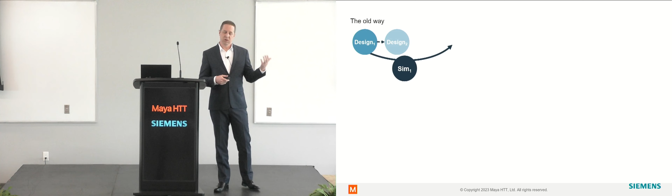If we look at the normal design analysis, design simulation process, we'll often start with the designer releasing an iteration of their design, send that off to the simulation team, and simulation is often a bottleneck. It's hard to do, takes a long time to do it right. By the time the simulation results come back, you're already on iteration 3, 4, 5. You might kick off the latest iteration for simulation.

And that cycle can continue for a while. This isn't really a communication problem even all the time. This is just because simulation takes time to do correctly. It can be a communication problem as well.

I know I had an example where I was working on a project, doing the simulation for about a month, and came back with the results. When I came back with the results, they told me that the design actually changed about 2 months ago, and nobody told me. So what do you do in that scenario? Well, you make a tough choice: either decide if your simulation was good enough then, or you have to go kick off this whole cycle again.

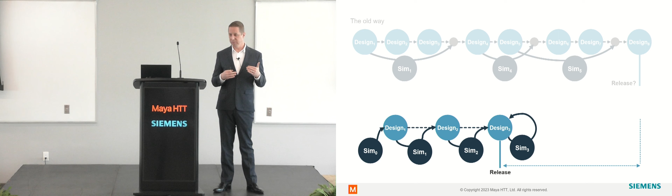But if we think about it for a second, what if I could take some of the insights of simulation? I could use those to actually feed into the first iteration of the design. And then from there, each successive iteration, I could use some simulation insight to feed into that. You're going to get a much better product. You're going to be able to look at more concepts. You're going to get a more robust product, and get it right the first time.

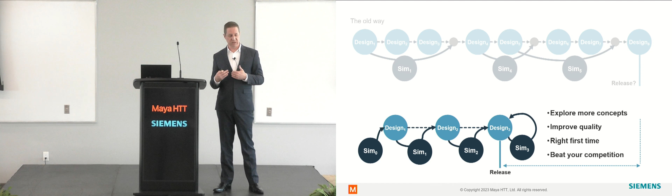And that's kind of what I want to talk about today: how you can accelerate your design process by taking advantage of some of the tools and methods that are available now, that you can put in the hands of the designer up front. And that's what we're calling simulation-driven design.

Before I talk about that a little bit more, I actually want to talk again about some of the benefits of it. The Aberdeen Strategy and Research Group had done a study and showed that companies that have actually fully embraced this simulation-driven design concept were able to see a reduction in the number of physical prototypes they had to do. They were able to reduce the engineering change orders after they sent a part to manufacture. That just means they got the part right the first time, didn't send it out to manufacture and then figure out there were problems. In addition, they're able to more often meet their cost targets and also speed up their development as well.

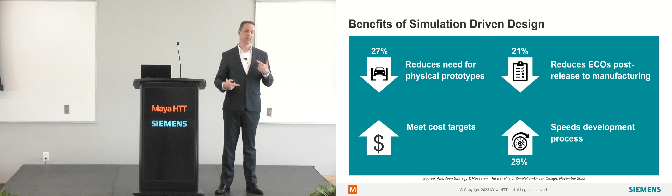Now, those are some pretty excellent improvements, and actually for something that I think any design team can implement rather easily. Some of the tools, some of the methods we've talked about today, they all help. Some of them are harder to implement than others. This one's actually really easy, and often built in already to a lot of the design tools you already have.

And to help walk you through this and explain a little bit what simulation-driven design is, I want to talk through an example workflow for you. We try to come up with something that I think's a fairly realistic workflow that'll explain to you some of the tools, some of the methods, and how you could integrate this into your design process as well.

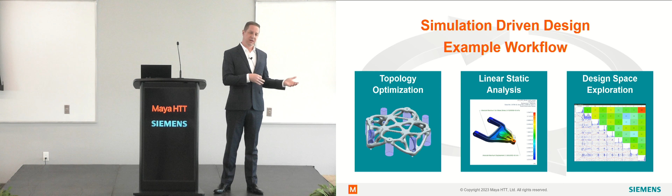So some of the ones we'll talk about specifically are the idea of topology optimization, sort of simple linear static analysis you can do, and design space exploration. Now, these are tools that simulation teams have been using for years, decades even. Now they can be in the hands of the designers up front to inform those designs as they go.

So let's look at topology optimization. Why topology optimization? Why do you want to do that? You've probably heard that name. It's a popular thing nowadays.

You've probably seen a bunch of parts like this, kind of funky looking, kind of cool, and wondered how does that work and what use is that. If you're not familiar with it, what it's actually producing is an obviously optimized shape. Often it's optimized to reduce the mass of the part, which saves material, saves cost, depending upon the process you're using.

Now if you have a 3D printer, if you have a really cool 5-axis CNC, you might be able to take these right from the topology optimizer and go straight to manufacturing with little to no editing, maybe. But the key with any of this is that you want to use this at the beginning of the process up front to get the maximum benefit out of it.

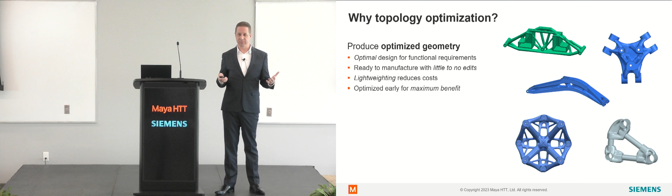Now the part I actually am really more excited about is the design guidance that this can provide. One of the key things when I look at it as an analyst, I see it as showing me the load path, which really just boils down to where do I need material and where do I not need material for this part to be most efficient.

It can also discover new and unimagined design possibilities. I'm not a designer, but I've worked with a lot of really good mechanical designers, and I think a couple things they have in common: they're really strong on engineering fundamentals, and they also have lots of good experience. But that experience might be tailored to a specific industry or company or type of part, so they're going to design anything like that often. This allows them to think outside the box, giving them more examples of how they could make a design work.

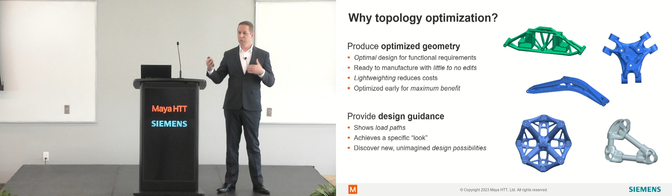How do you know where you want to start on that? How do you know where the optimal design is in that? Well, a topology optimizer is where you define the constraints, bound the box for it, and then let the algorithm search through there, and let it go, and it'll find what it considers the optimal part, whether you're optimizing for stiffness or mass.

Now, in reality, the shape of a part, even the material of the part, all that, we all know as designers that's not the full scope of the design. There's a lot more to it. There's 100 different other choices that any engineering designer has to make when they're building a part.

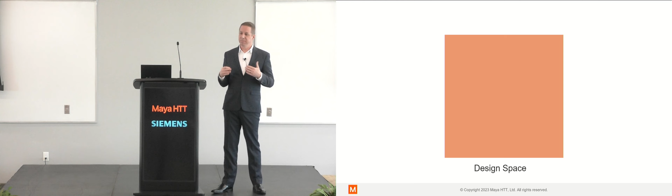So I really like to think of it as more not finding the optimal part, but really reducing the design space that you have to look in. It weeds out all the suboptimal areas and just limits the number of choices you have left to make.

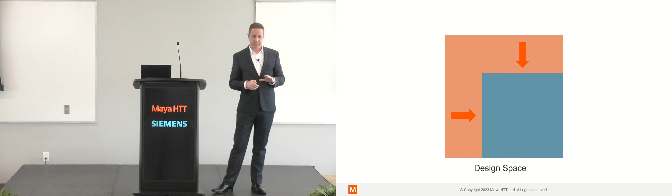And why is that important? Because if we think about what we're trying to do, we've had a lot of talks today about the design process and everything that's involved. We're really looking at this as a time axis. At the very beginning, you have a lot of choices to make. Each successive choice you make in this design gets you closer and closer to that final part. And if you're able to reduce up front a lot of the area you have to look in to design that part, you're just reducing the time to get to that end product and speeding up your whole cycle.

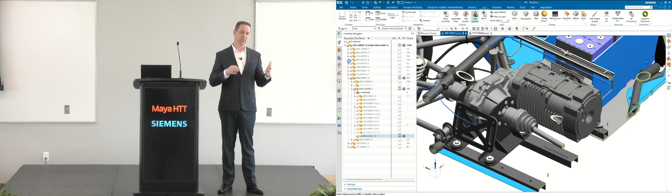Now I want to show you a quick live example here. I've only trimmed out a few minutes here and there. This is working within the context of NX, using the topology optimizer in NX. There are other tools available, but this one lets you work in context, just in the CAD environment you're used to.

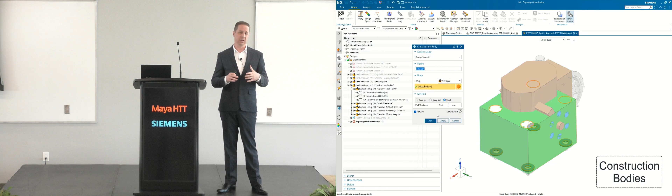We started in the assembly. We took a bracket and we're now choosing the design space. So we're telling the optimizer, hey, you can put material here in this green box, and then saying don't put material in these locations because it interferes with the motor that bracket is holding, or it interferes with the bolts, or it even interferes with getting a wrench in there to tighten the bolts, so you need some clearance as you install this part.

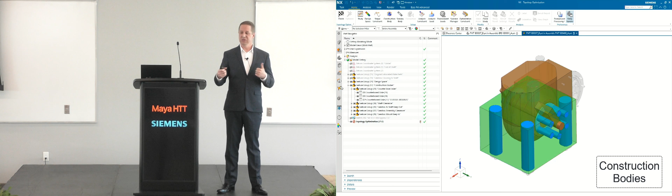So you just go through and set all this up. It's a pretty simple workflow that any designer who's used to NX and used to working in CAD can do. They're going to set up the constraints.

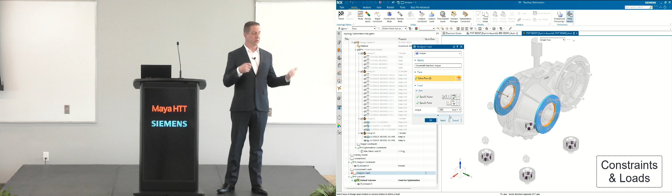Okay, it's fixed at the bottom because there's 4 bolts to this part. They're going to work through and pick where they want to put the loads on the part and how they want to load up this.

You'll actually see you can even, in this specific tool, do multiple load cases. So this was on a car. You can do a cornering case, acceleration case, braking case.

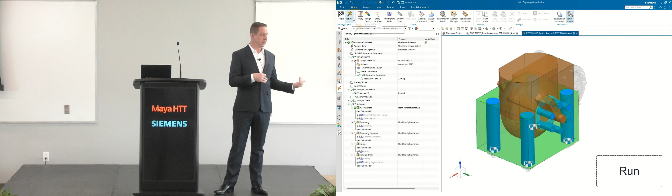You just build all those up, then you let it know: am I optimizing for stiffness? Do I want the highest stiffness, or do I want the lowest mass? This first run I'm showing here, we were optimizing for stiffness. That one took about 5 minutes to run. You can see it's pretty beefy.

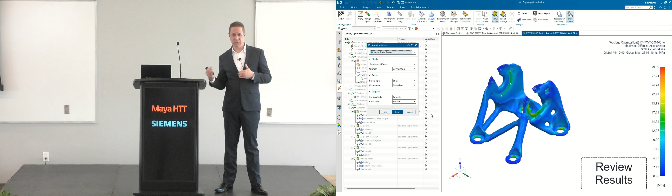You're starting to see where the load path needs to be stiff, and then you can look at the performance right here in the same tool, see how the deflections and the stresses look.

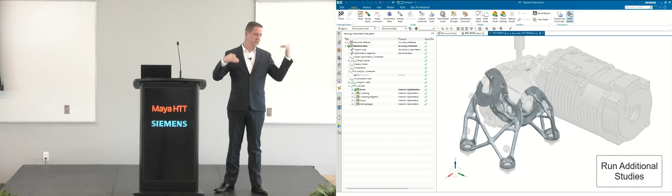We're going to go back and say, well, actually, I want to reduce the mass of this part because I want as light a weight as possible while still not exceeding some stress threshold for yield. There's different constraints you can put on that. Now you come up with something like this, and you get sort of a typical topology optimized shape.

Because you're in the same CAD environment, you can go through, work with this, make edits to it and change it, and if you want, stop right there.

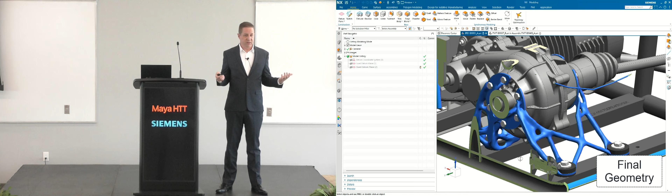But if we review our workflow here, I started with a typical sheet metal bracket, and then I chose where the design space was. I said, you can put material anywhere in this space and give me the optimal part. And that's what it gives us.

You've probably, if you've heard of topology optimization, seen examples where you start with some normal looking part and then end up with something like this. And if you're not the type of group that does 3D printing or really crazy machining, what do I do with this? This is useless.

I'm not going to even bother with topology optimization because nobody would ever build that in my industry. Well, that's where the second part comes in of topology optimization. The thing I think we don't focus on enough is how it can guide design.

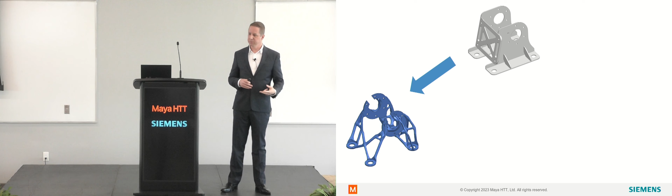Let's say, because there's other constraints to this design, it has to be sheet metal for cost and manufacturing purposes. I can actually use this part to guide myself as a designer to build a new sheet metal part that sort of mimics that shape.

Again, I'm looking at where the load paths need to be and coming up with a new design that can still be manufactured in pretty much the same process as I had originally, but takes advantage of topology optimization. I think that's really powerful, and it shows it can be used for anybody and any type of design.

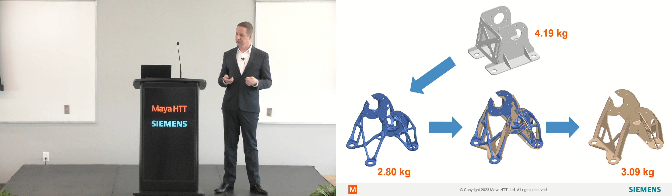If you look at the results here, I was able to reduce the mass by about a third using just the straight topology optimization. My new sheet metal part's a little heavier, but still reduces the mass by about 25%. Not bad for half a day's work of the designer tooling around in CAD.

So let's say I got this new design. I want to look and see how it performs. I haven't really checked the stress, I just came up with something I thought looked good as a designer. Do I need to kick this over to the simulation team and let them do it?

No, I can actually do this right here myself, again in the same context of the CAD. It's continuing that digital thread, staying within that unbroken workflow.

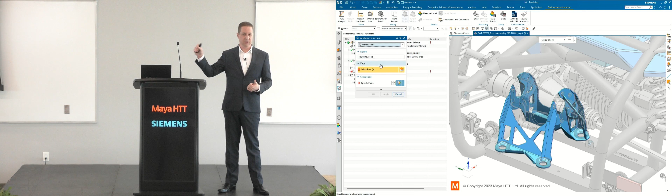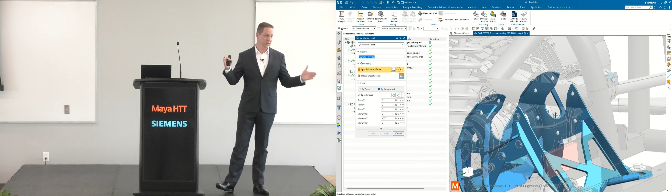I can set up the loads, I can set up the constraints here for this new part that I designed, and I can actually analyze it really quickly. This video specifically, for time purposes, the topology optimization depending on how detailed you want to look at it can take 5 minutes or 30 minutes.

This video is actually live, we didn't edit anything out of here. So you're seeing right here how quickly you're able to set up the part, set up the loads and the constraints, and then get results.

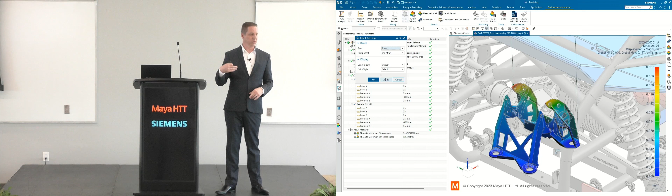So we're looking at, I believe, the deflections right there. You can come through, look at the stresses, and then even go look at the animations as well.

As a designer, this is really useful because a good designer is always going to do some type of analysis up front. Often it's going to be hand calcs or an Excel spreadsheet or something.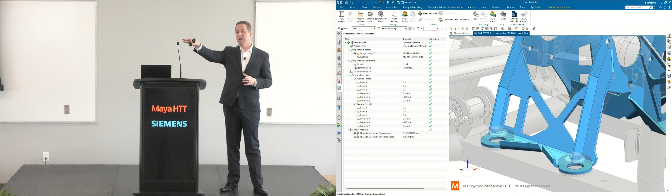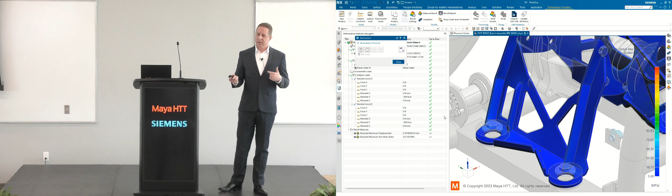Good designers might even know FEA and be able to pull the parts in. But if you can just do this quickly to get an idea of where your part is, that's really powerful. You can see right there, we saw a little too much deflection in that section. So we added a new bracket or rib right there to reduce the deflection of that part.

Just real quick, simple insights, simple changes. Again, we're just getting to a better and better part before we even have to hand it over to the simulation team for any higher end analysis, or before we send it out to manufacture and test it to see if it's gonna break. We have a good idea up front.

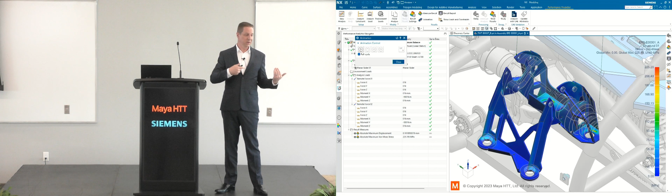So if we look again, let's see where we're at. What are we doing here? We started with this new sheet metal design that we based off the topology optimization. We were able to really quickly, in about a minute, do some quick analysis of it. And then we added an extra little rib there just to improve the performance of this part further.

But what if you want to actually look at a whole bunch of different options? We made some choices about the holes in this part to lightweight it, trying to match the topology optimization and keep the mass light. But are those holes the right shape? Are they in the right place? Is the thickness of my sheet metal correct? What if I want to explore a whole bunch of this? Do I have to do this manually?

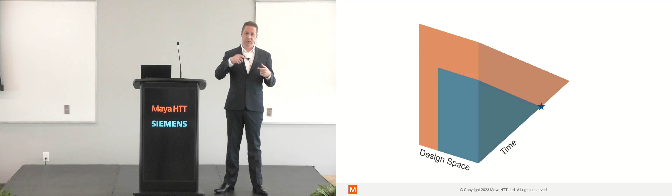No, actually you don't. If we go back to the design space and time that we were talking about, that's where a Design Space Explorer can come in. Now what this is going to do is kind of just a fancy name for automating a whole bunch of analysis runs for you, is kind of how I look at it anyway.

You're already working with a parameterized part. You have variables in there, you have dimensions. You can set this up so it will iterate through different combinations of those and start looking in your design space, running those analyses for different combinations. It's going to find which ones are feasible, which ones are infeasible, and then you're able to see the performance of those and pick the best one.

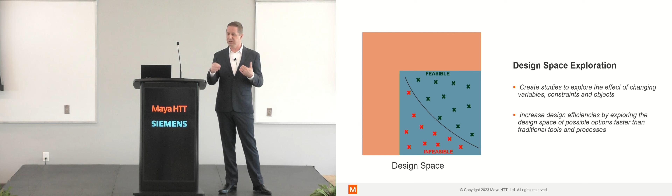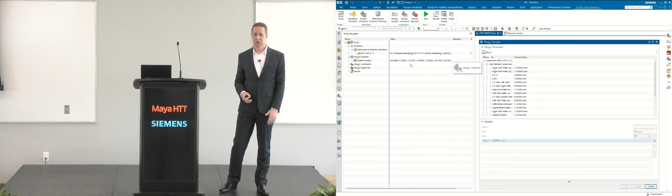So we go back to the video example again. Here we're using the Design Space Explorer, built into NX here, NX CAD. So I already have CAD. It's hard to see, but I already have a bunch of dimensions in there that were already part of my part. So it's real simple to pick any one of those dimensions.

You can set them up, if you're familiar with NX, as expressions. Pick any one of them. Say I had a dimension of 6 millimeters, but I want to say, all right, Design Space Explorer, for that dimension, look from 2 millimeters to 10 millimeters and do it either continuously or at 2 millimeter increments. And you can set that up for a whole bunch of different variables. That's basically all there is to it.

You're setting up constraints there. You're saying the feasible versus infeasible is going to be whether it's above a certain stress level or not. You're going to say, what am I looking for? I'm looking to reduce the mass. And basically you hit run on this.

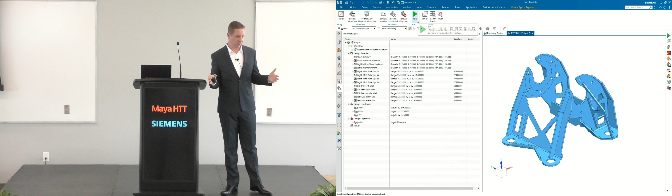Depending upon how many variables you set up and how many iterations you want to do on each variable, that might depend on whether you take a quick restroom break or go to lunch and come back. Time may vary slightly, but it's all pretty quick, all within a day. You can see the holes and shapes changing as this automatically iterates through all these design changes, running all these studies in the background and coming up with the results.

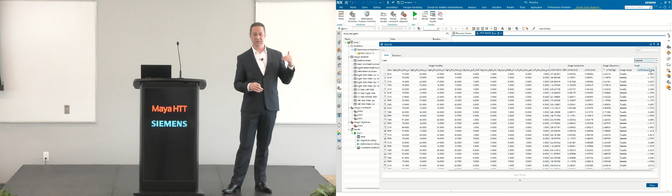Now the cool thing about this is you can go back and look at all the results. Often you only care about the best result, maybe the optimal design there in green, but there might be reasons why that one doesn't work. You can look at the space of all the designs you looked at and decide the second best, third best, or fourth best here is pretty good, and it meets other criteria for this part that you can't easily put into CAD. So it's pretty simple.

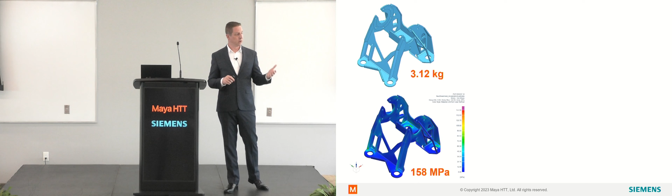And if we look again at what we were able to do there, so we started with our design that we put in the Design Space Explorer. We had a mass and we had a stress for that. And then at the end we ran about 104 permutations.

We were able to actually get both reduced mass and reduced stress. And if you remember from the very beginning, our topology optimized shape, that sort of funky shape that I didn't know how to manufacture with the tools I had available, was 2.8 kilograms.

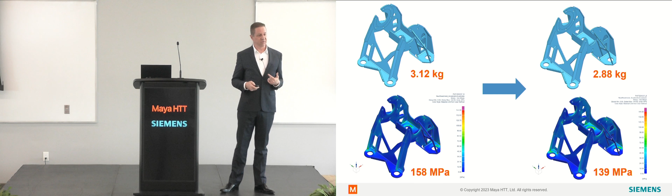We're only 3% off that now, and still in with the design process we want to use for manufacturing. Now, if we take a full step back and look at the whole workflow that we went through, simulation and design. So remember, the goal was to try and find tools and methods that we could put in the designer's hands to let them inform all their design decisions with simulation.

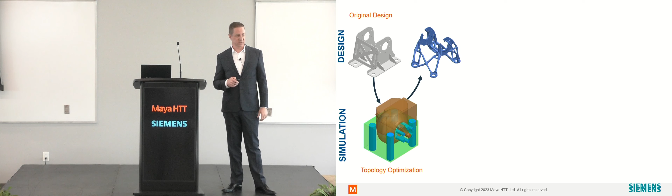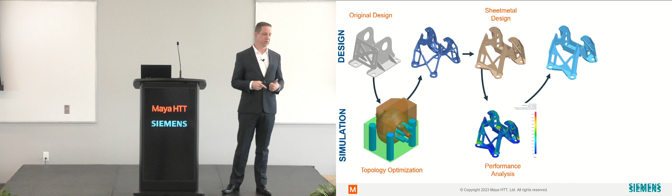So we started with an original design, so let's scrap that. We're going to look at the design space and look at topology optimization. Came up with this shape, but decided I can't manufacture that. So, but I'm going to use that to guide a sheet metal design for me. I'm going to look at the performance of that, but one time wasn't enough. I want to look at more iterations, and I looked at 104 iterations of that and ended up with this final design here.

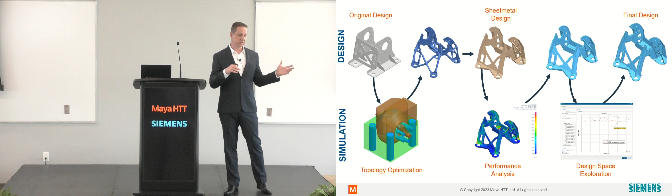So now you might be done there. That might be good enough. You might send that off to manufacture and test. You might send that off to build and install. But you might also want to look, then quickly just move on to higher end analyses.

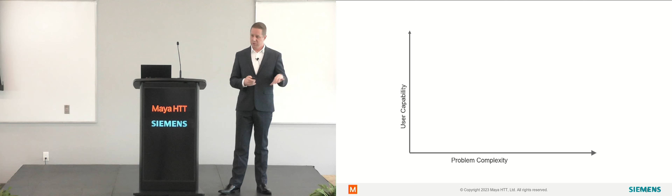So again, a lot of the things today, we're trying to shift everything to the left on the design cycle. Actually, it's left for you guys here. That's my left. But we're trying to shift everything to the left. We're trying to get everything faster.

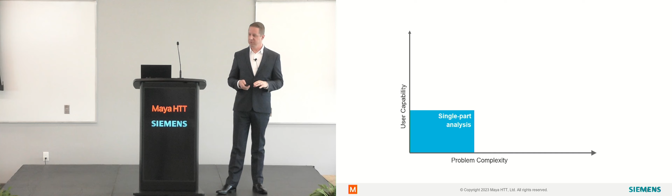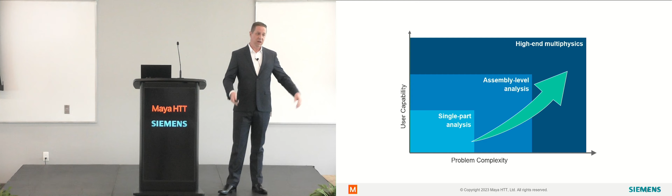So you were able to do the single part analysis quicker. You were able to look at more concepts. You were able to build a better design, try and get that right the first time, which means you can move more quickly to assembly level analysis. You can move more quickly to the high-end multi-physics. And that's where everything is kind of going nowadays.

For instance, this is just sort of an example of all the types of analysis the simulation services team at Maya has expertise in. And this is what we're seeing more and more. Customers are moving to this level to maintain, to be competitive, to stay ahead of everybody, and to get better products out.

Now, you're sometimes not even going to get to this level if you can't get past that first hurdle and all the time needed to analyze that first part. So that's the whole goal. Shift everything to the left, give tools to the designers so they have a simulation-driven design, and then be able to move to higher order things to make your designs better.